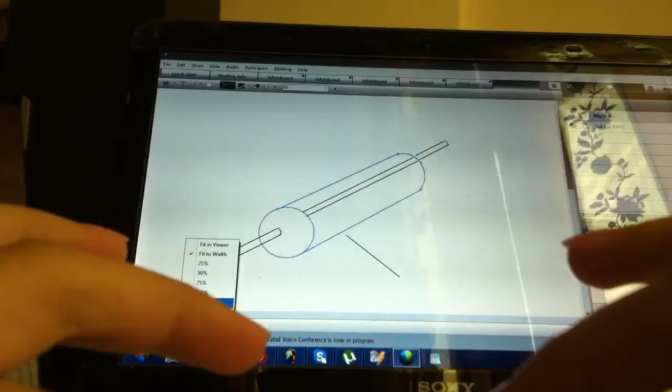So just think, this is a complete iron rod and I use a coil here that goes over that glass cylinder like this. It comes through the bottom, again goes like this. Is that right? We have wound it outside that glass cylinder. Is that right? Yeah.

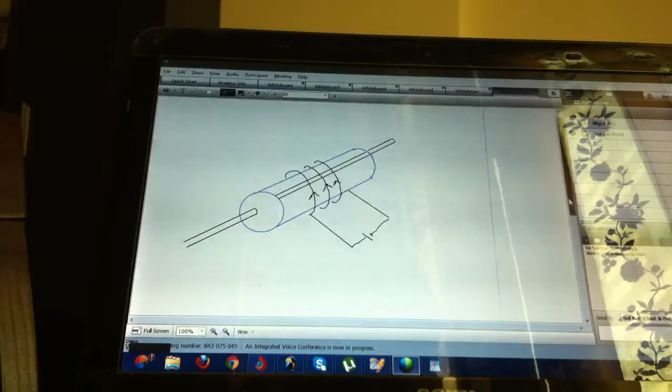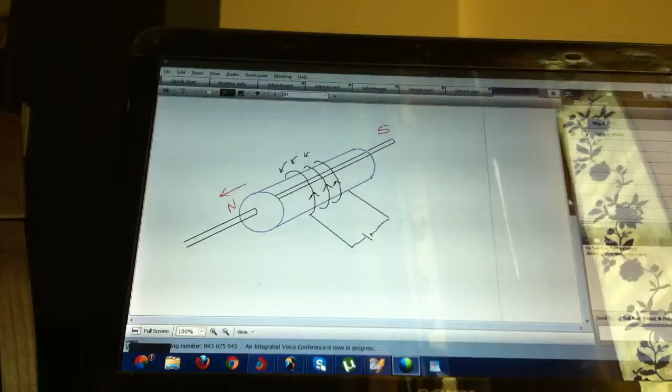So if I connect this side with positive and the other side with negative, will current flow through that coil? Yeah. And it will flow in this direction, and going down from the other side. Is that right? Yeah. So, placing your right hand, curl the fingers of your right hand in the direction of the current. Where is your thumb pointing? Is it pointing that way? Yes. So this will be the North Pole and this will be the South Pole. Okay. Is that right? Yeah.

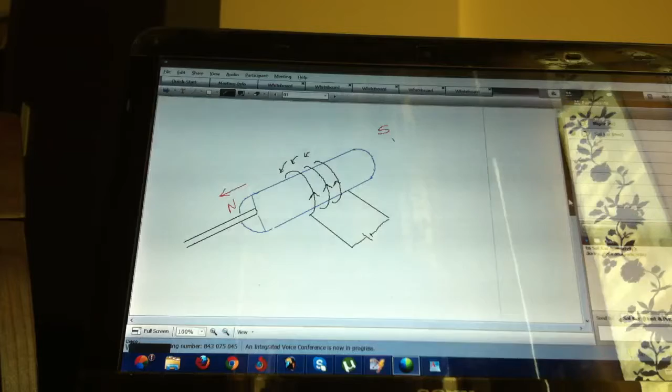Okay, now look. I break that and I show something to you. Instead of using a single rod, I use two pieces of rod. I have actually cut that tube and I'm showing you the two halves. So that rod from one side, from the north side going in, will be the North Pole. Is that right? Okay. It will be one kind of pole.

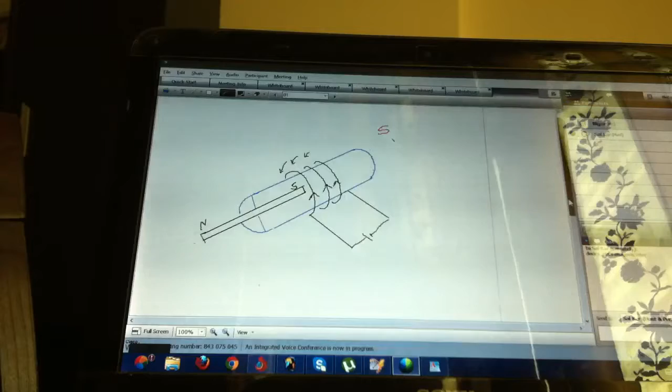If this is the north, then, actually that is not discussed in that detail, but what will be the other end of that pole? That will be the south. South. Is that right? Yeah. And I use another rod here. I need to cut the other side also into two halves. So if I cut it in half, that glass tube looks like this. Is that right? Yeah.

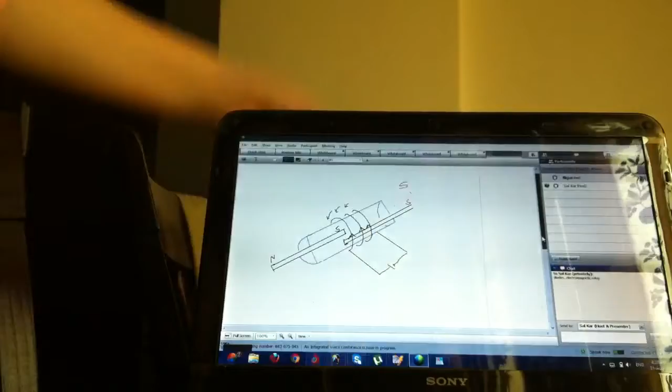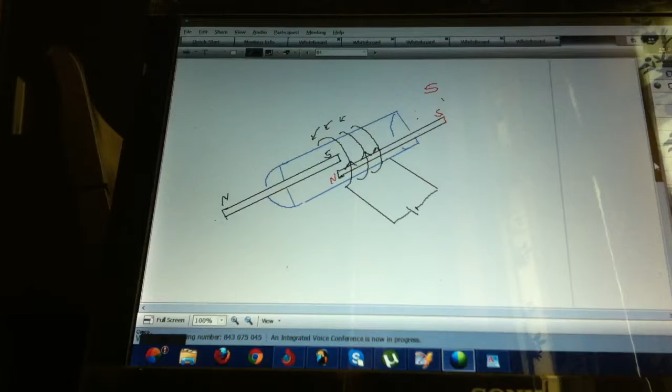So this will be the South Pole. If this is the South Pole, what will be the other pole of this rod? North. They will be magnets. These two rods, iron rod or ferrous rod, are magnets as long as current is passing through that coil. So they are fixed at this and this position, but as they become magnetized, won't they attract each other because they are opposite poles? Yeah. So they get connected, the circuit gets complete, and current can flow through it.

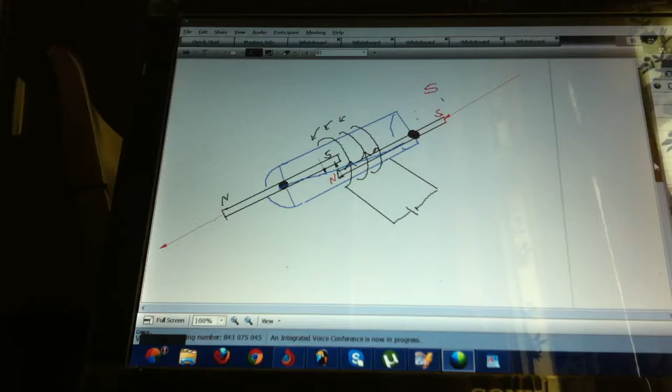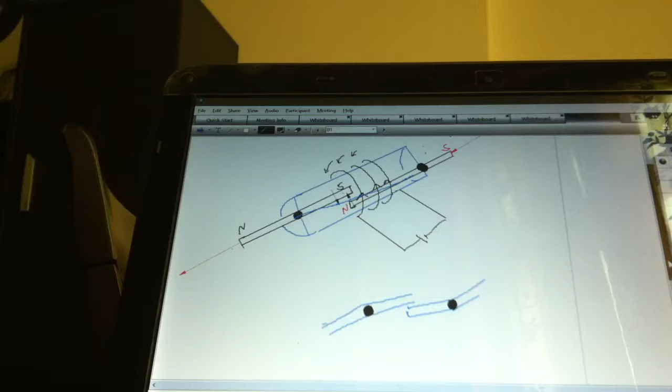But actually what has happened? They have to bend a little because the other ends are fixed. So they bend like this and this. The black points are just fixed? That's right. So as they attract each other, they bend like this. Normally they should be straight. But they bend only when they get magnetized, because opposite poles attract each other. And they are magnetized only as long as current passes through the outer coil.

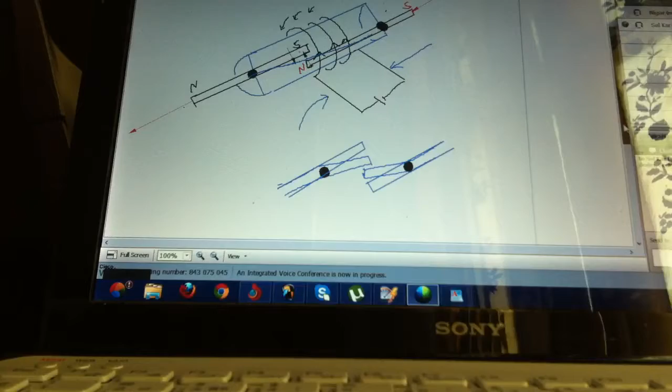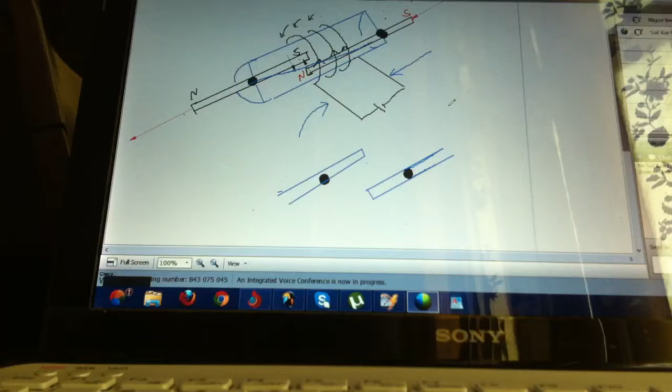If you turn off the current in the outer coil, will these two rods remain magnetic? Is this the outer coil? This one? There is only one coil, the brown coil. Oh, okay. So if you stop the current, will these two rods inside that glass tube remain magnetic? No. That's right. So will they keep attracting each other? No. So they go back, because they bend only because of the attractive forces. So they are disconnected again, and no more current can flow.

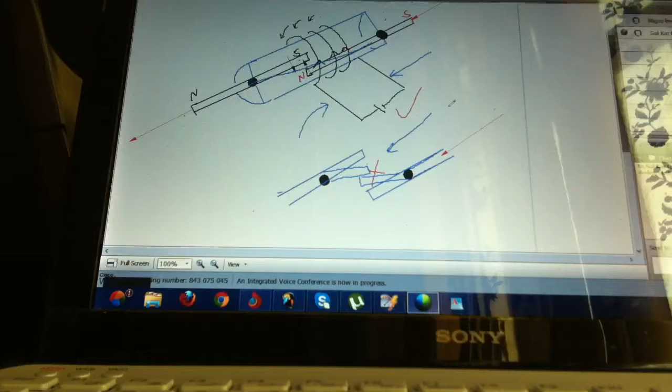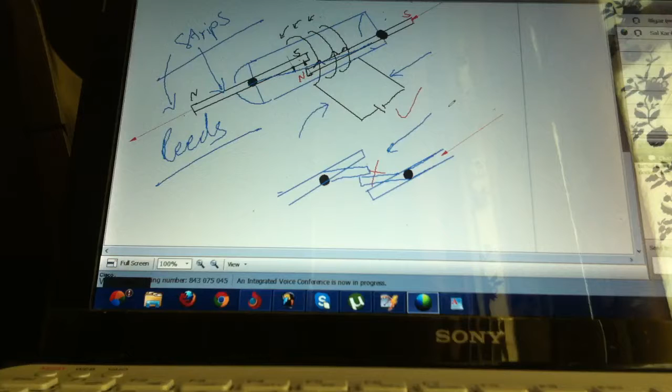But if you turn on the current in the coil again, they will become magnetized, attract each other again, and the circuit gets complete. So that's what it says: one such switch is shown in the figure. When current flows in the coil, the magnetic field produced magnetizes these strips. They call these strips reeds. Which strips? The two strips. Got it? Yeah. So these strips are reeds.

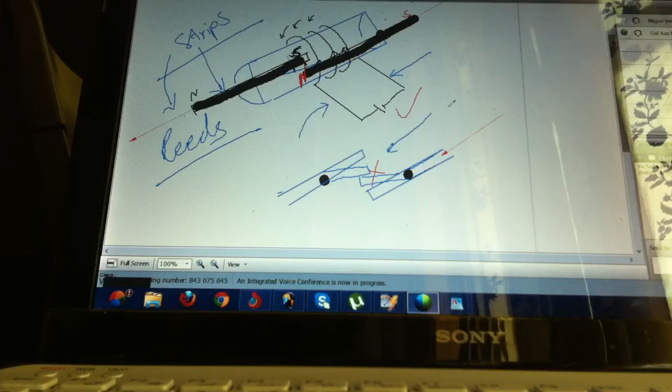So when they get magnetized inside the glass tube, the ends become opposite poles, as we discussed. Can you see the small N and S written in the center? Yeah. So these opposite poles attract each other and complete the circuit. And as soon as you switch off the current in the coil, the reeds separate, because they are no longer magnetized and there is no more attraction, so it gets disconnected again. Got it? Yeah. Okay, is there any other question on reed switches? No.